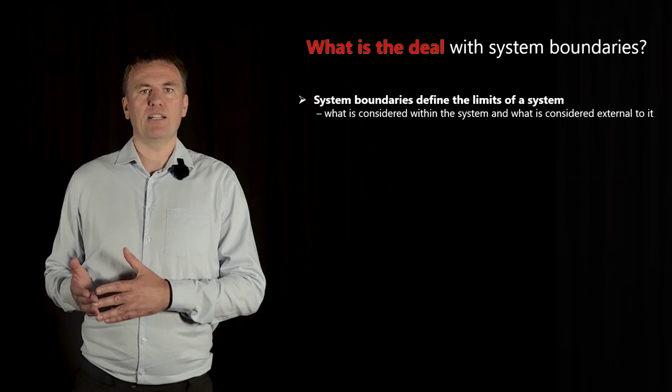First of all, what is the deal with system boundaries and why do they matter? The answer is system boundaries matter because they define the limits of a system, that is, what is considered within the system and what is considered external to it.

In principle, the system boundary can range from primary energy generation all the way to the end user. A holistic system boundary therefore includes the primary energy system, the thermal energy system, and the final energy consumption. This opens the question: what should be included in the system boundary and what can be considered external to it when evaluating the impact of new solutions in our systems?

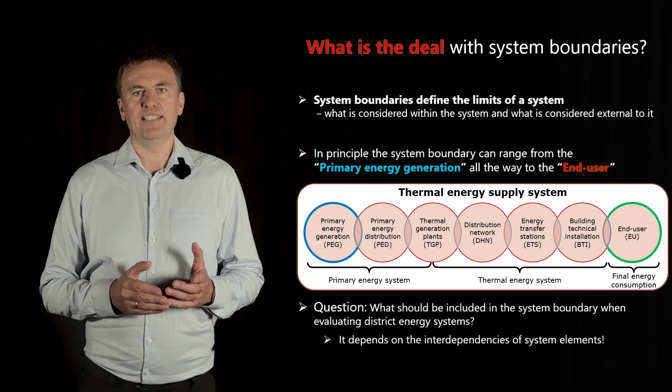The answer is, it depends on the interdependencies between the system elements. In district heating, there are many solutions that have an extended system impact. These solutions can be implemented at different levels of the system and can be both hardware or software based.

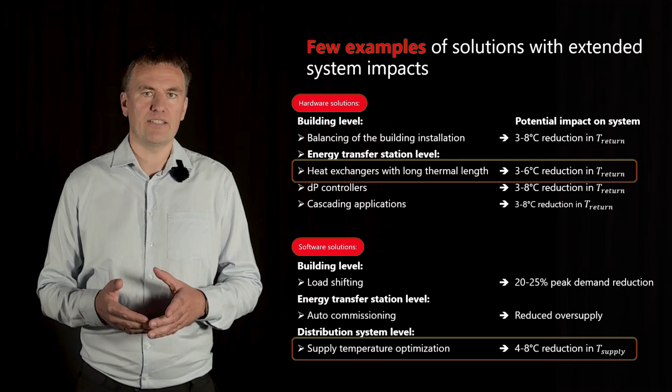In this presentation, we will focus on evaluating the benefits from two solutions: a more efficient heat exchanger in the energy transfer station, where we assume a 5 degrees reduction in the return temperature, and a software solution for optimizing the supply temperature of the distribution network, where we assume a 5 degrees reduction of the supply temperature.

To explore the importance of the system boundary, we will use a reference system which is either using a biomass boiler or a CO2 heat pump. For the CO2 heat pump, we assume 50% renewable power and 50% gas-based power, and those are our baseload plants. In both cases, the peak load is handled using a natural gas boiler, and the baseload plants are dimensioned to cover 60% of the capacity demand.

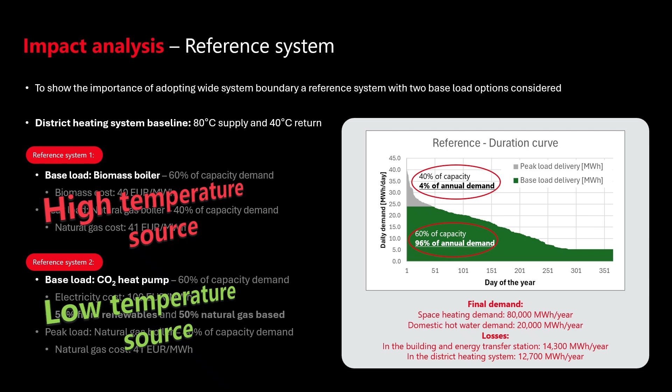They will account for 96% of the annual heating demand, and the remaining capacity and heat demand comes from the natural gas peak load boiler. Without going into system details, I want to make the following distinction of these two cases: the biomass-based system represents a high temperature source, and the heat pump system represents a low temperature source.

Now let's get into the more complex part of the presentation: the interdependency of system elements. Which system interdependencies should we expect from implementing the considered solutions?

Commonly for both solutions and considered baseload sources is that identical impact is expected from the distribution network to the end user. The efficiency of the distribution grid will increase, as well as the efficiency of the primary side of the energy transfer station, and there will be no impact on the secondary side of the energy transfer station to the end user. As for the thermal generation plants, the two solutions will have different upstream impacts.

So let's start with the biomass boiler case. In case of a reduced supply temperature, we would expect a marginal, or almost no impact on the thermal generation efficiencies, and only marginal impact on the upstream elements from there. These impacts on the upstream elements are driven by the reduced distribution heat loss.

On the other hand, if we decrease the return temperature, we can assume increased heat recovery from flue gases, which will increase the efficiency of the biomass boiler and consequently avoid some peak load boiler operation. This will change the primary energy mix and lead to a slight difference in the upstream impacts as follows.

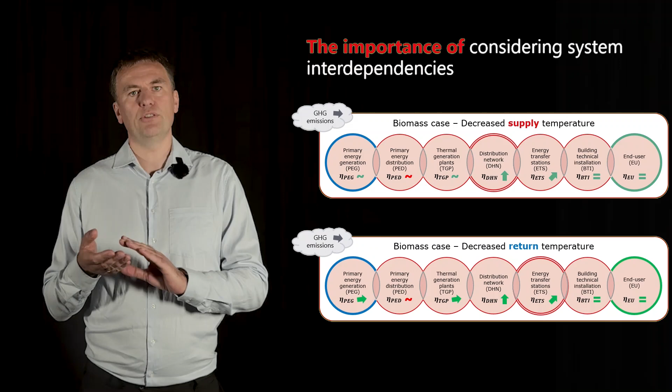Now, as for greenhouse gas emissions, in both cases we are increasing the system efficiency and therefore the emissions will go down. We should expect a larger greenhouse gas emission reduction from reduced return temperature, due to increased share of biomass in the primary energy mix.

Now let's explore what changes in the case we have for the low temperature heat source, the CO2 heat pump, as the baseload heat generator. First of all, we should expect the same impact on the distribution network and downstream elements as in the biomass case, and we will therefore focus on the upstream impacts.

By lowering the operating temperature of the distribution system, we can significantly increase the operational efficiency of the heat pump. In this analysis, it's assumed that for every degree reduction in the supply temperature, the efficiency of the heat pump increases by 2%, and for every degree reduction in the return temperature, the efficiency increases by 3%. This is especially the case for CO2 heat pumps.

The increased efficiency of the heat generation will have the following upstream impacts. For the primary energy distribution, we will only expect a marginal efficiency drop, again because the natural gas distribution is so efficient and it's more efficient than the electricity distribution.

The efficiency of the primary energy generation will, on the other hand, increase significantly, and that is driven by the greater share of renewable power in the primary energy mix, which is significantly more efficient than the power generation from natural gas.

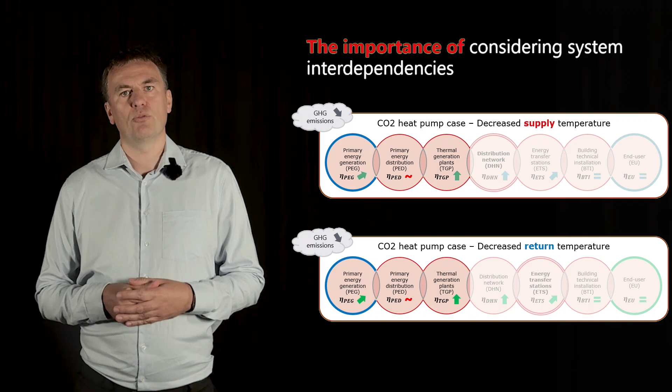Now, as for the greenhouse gas emissions, the significantly reduced natural gas consumption will lead to significant greenhouse gas emission reductions. Now, let's compare the impact of adopting a traditional silo system boundary against a holistic system boundary.

When we are evaluating the impact of the different cases, different solutions: if we choose a silo system boundary, we are ignoring both upstream and downstream impacts. That is, we are assuming that a change in one element has no impact on the operation of the other system elements.

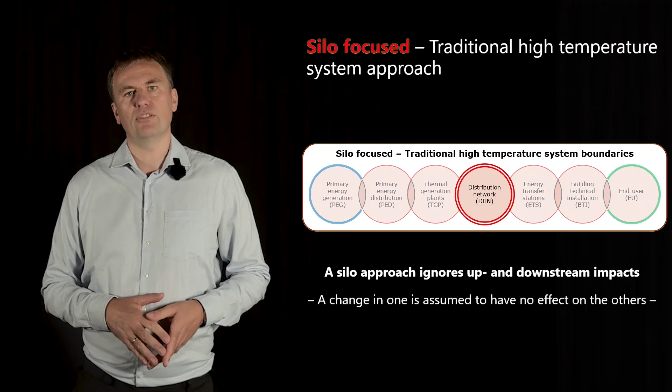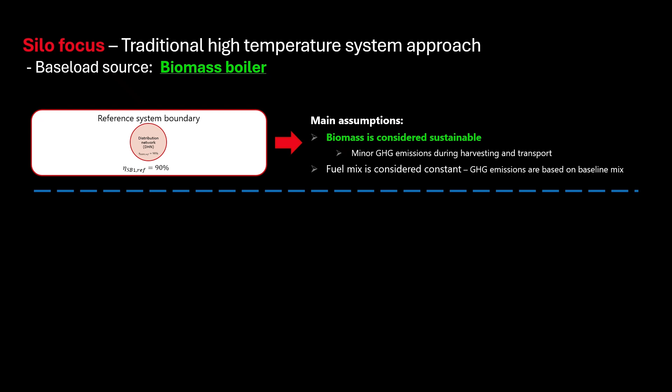If we analyze the impact using a silo system boundary, only considering the distribution network, we would expect a similar impact from both solutions if we reduce the return or the supply temperature. The key impacts for the biomass case are estimated as following.

Heat loss savings of approximately 715 megawatt hours per year, a system boundary efficiency increase from 90 to 90.5%, and cost savings of 25,000 euros per year, and greenhouse gas emission reduction of approximately 33 tons CO2 equivalent per year.

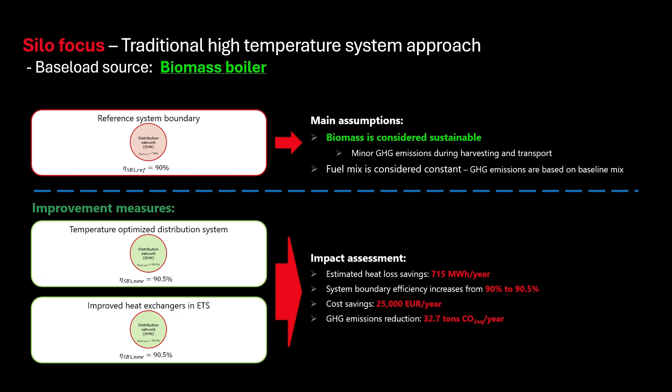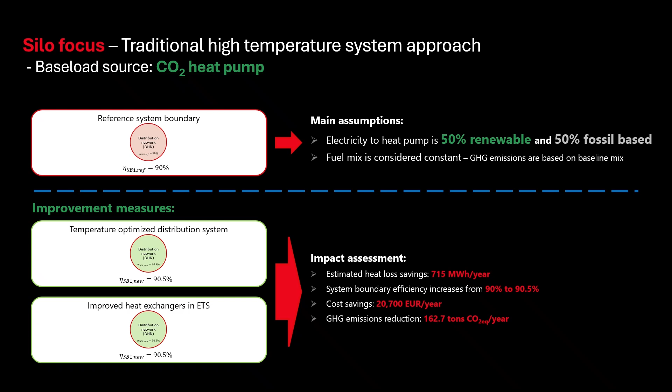But what about the heat pump case? Well, as expected, the estimated heat loss savings and system boundary efficiencies are the same. The cost savings are estimated to be 21,000 euro per year, and the greenhouse gas emission reduction about 163 tons CO2 equivalents per year. Now, let's abandon the silo approach and go for the holistic approach.

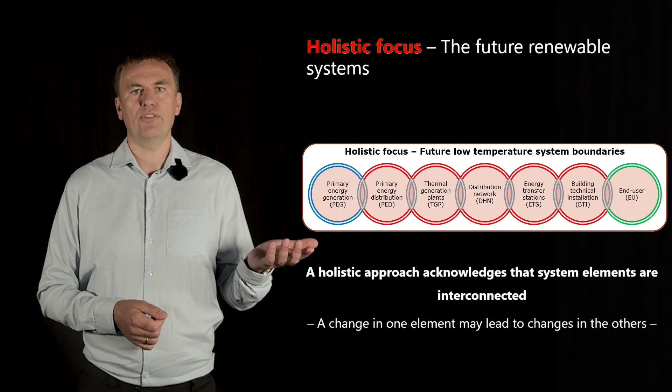With the holistic approach, we acknowledge that the system elements are interconnected, and that is, a change in one element may lead to a change in the others. So let's move on and look at the impacts.

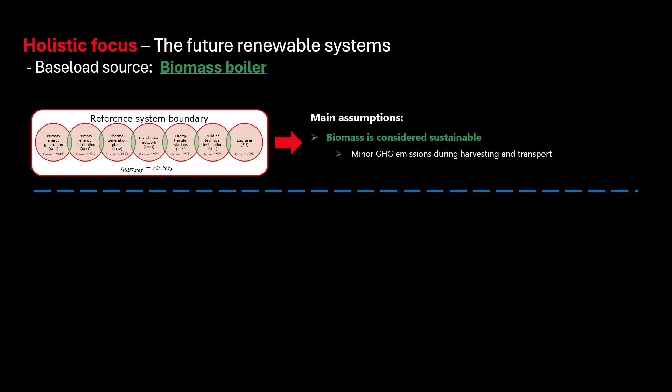In the analysis for the biomass, it is assumed that the biomass is sustainable, and we will, of course, prioritize biomass over natural gas. And to save time, we will only focus on the differences to the silo approach.

So instead of the estimated 715 megawatt hours heat loss savings per year, the holistic focus approach estimates primary energy savings in the range of 1,400 to 2,400 megawatt hours per year.

Instead of the estimated savings of 25,000 per year, the holistic focus estimates cost saving from supply temperature reduction to be around 29,000 euros, and if we reduce the return temperature, around 67,000 euros per year.

Finally, the greenhouse gas emissions will be estimated to be significantly larger, a change from 33 tons per year to 450 and 620 tons per year. And this is due to the changed primary energy supply mix.

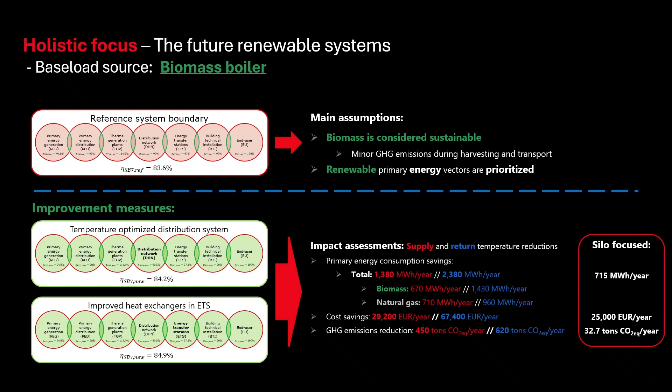As you might expect, the difference will be more significant in the case of low temperature heat sources. And in the analysis, the renewable power generation is of course prioritized over natural gas-based power generation.

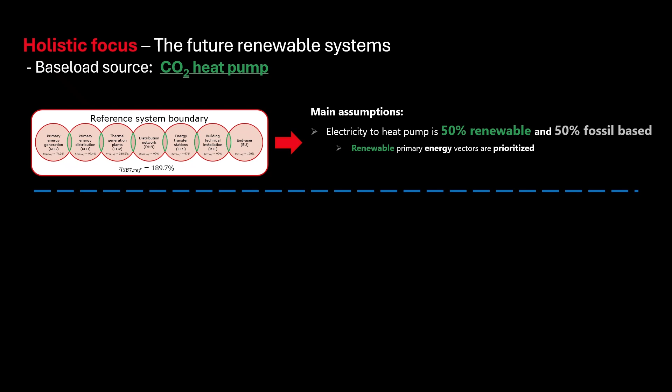So how does the holistic approach compare to the silo approach when we have the low temperature source? Instead of the estimated 715 megawatt-hour heat loss savings per year, the holistic focus estimates primary energy savings in the range of 9,400 to 13,000 megawatt-hours per year.

Instead of the estimated saving of 21,000 euros per year, the holistic focus estimates cost savings from supply temperature reduction to be 368,000 euros per year and 518,000 if we are reducing the return temperature.

And this is a game-changing difference when we are comparing and choosing what investments we want to make.

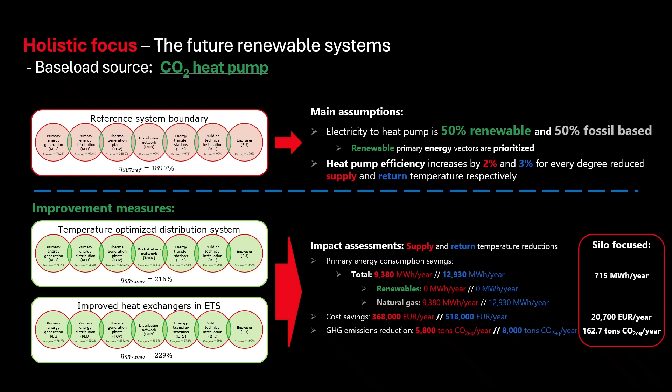Finally, the greenhouse gas emissions will be estimated to be significantly larger, a change from 163 tons to 5,800 up to 8,000 tons CO2 equivalent per year. Again, this is because of the changed primary energy supply mix.

Now, to conclude, extended system boundaries highlight higher order benefits, and these higher order benefits can significantly impact investment decisions because we are more accurate when we are estimating the benefits, such as through reduced operating costs due to the reduced heat losses and as well the changed primary energy demands.

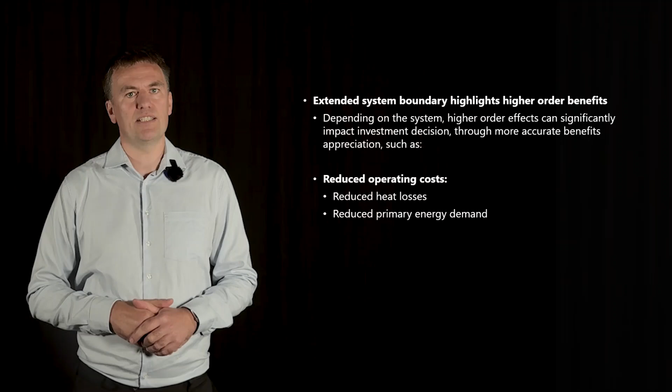That can also lead to a reduced future investment demands if we, for example, can get more out of the existing heat plants.

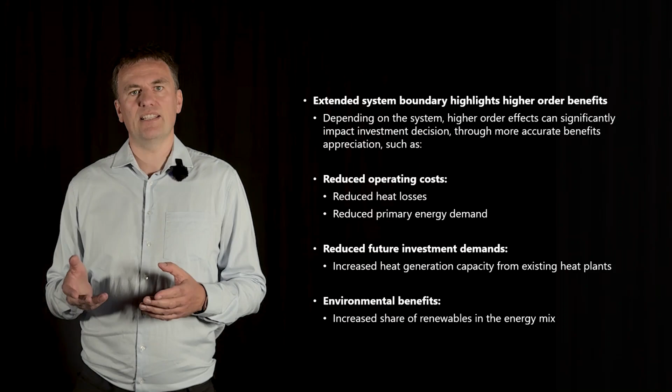A holistic approach will also enable us to better consider the environmental benefits when we are planning for new investments, and by that maximize the future share of renewable in the energy system.

So if I try to give a core and clear conclusion, it will be: a holistic approach enables picking the long-term low-hanging fruit. If you have any questions, you are welcome to contact me using the provided contact details.